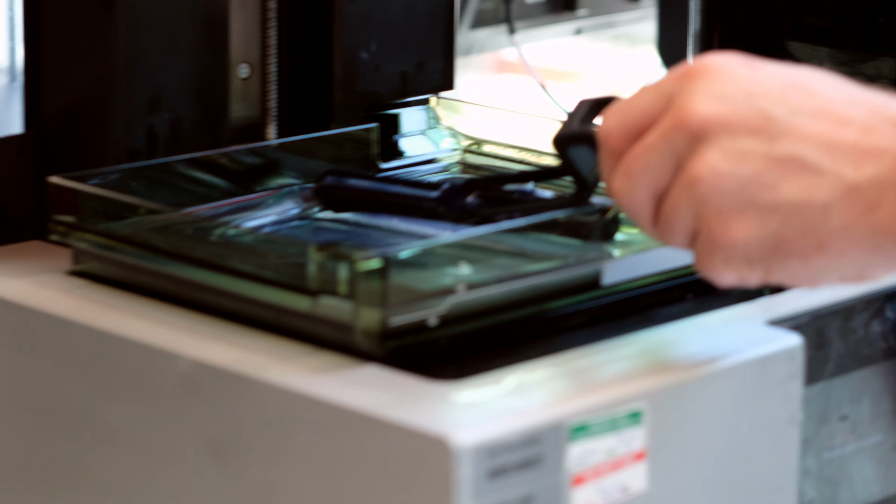So this machine here is the FormLabs Form2. It's now been superseded with the Form3, which has got a slightly bigger build volume. How it works, I'll lift it up. There's a liquid in here. A bit closer, have a look here, so I can move it around. That's a liquid, and it's a photopolymer. So it'll convert from a liquid to a solid when it's exposed to ultraviolet light.

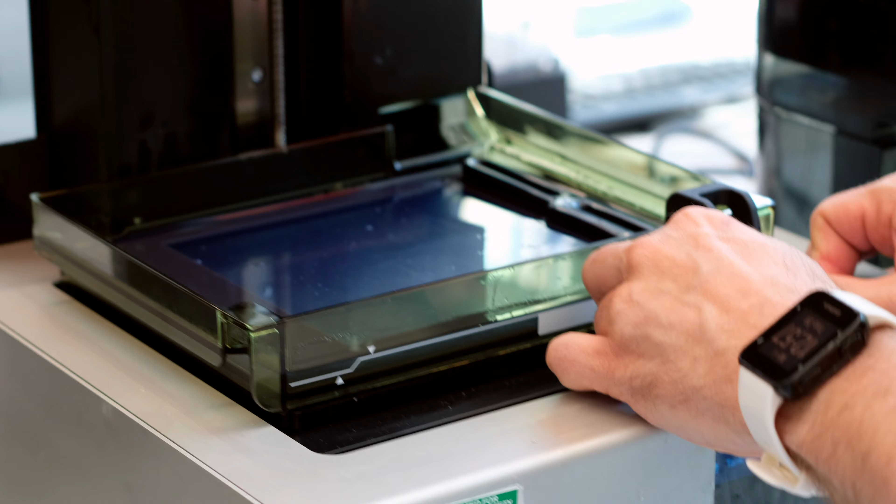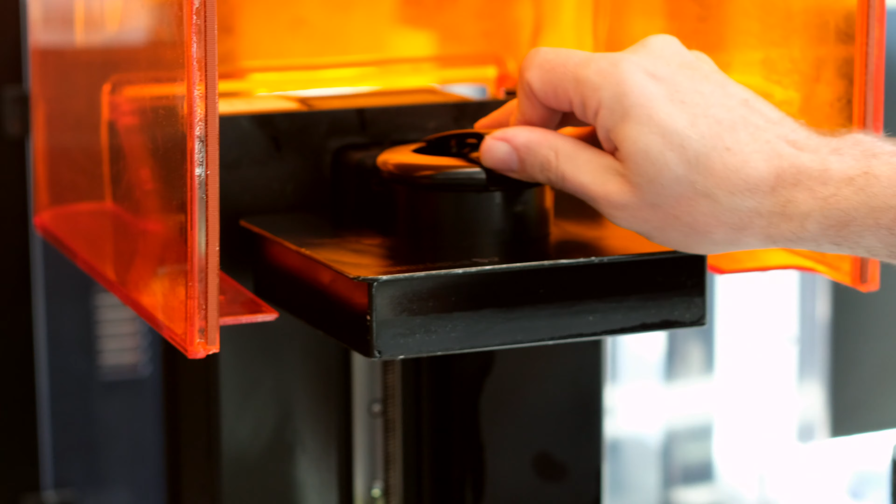And the exposure, you can see if we take that off for a moment. It's clear in there. And there's a screen, and there's a laser pointer underneath that screen. And that laser pointer will cure each layer as it builds the part up. This is a build platform. This build platform is just an aluminium base. It's well used.

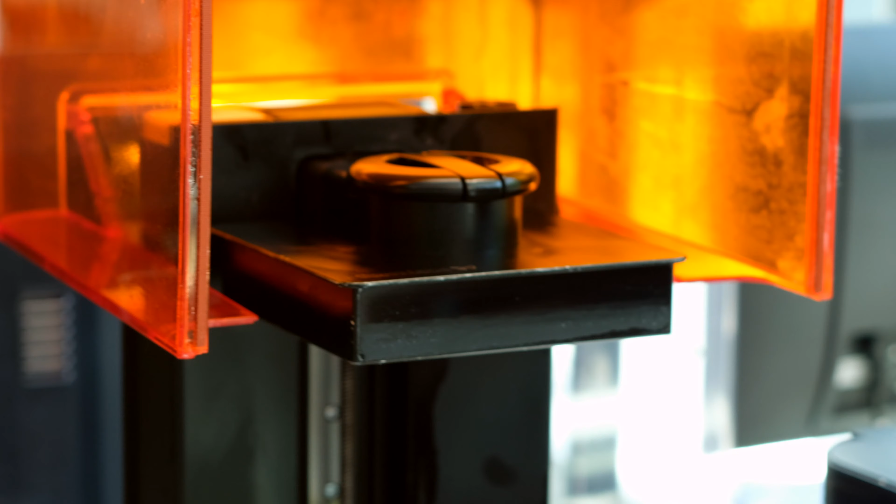So what it'll do, each layer, it will do a bit of a dipping process. It will go down to the build layer position. The ultraviolet laser will scan across and it will cure that particular layer. Then the build platform moves up. We've got a wiper here which wipes across, gets rid of any debris, makes a nice clean surface. Then it moves down again and it cures the next layer.

So rather than the other way round, here it builds the part up upside down. When it finishes, your part is upside down on the platform. You take it out, and we've got a wash station here, which is filled up with IPA, and that just washes any material off. The material is kept in these containers here at the back. I'll go into that in a moment.

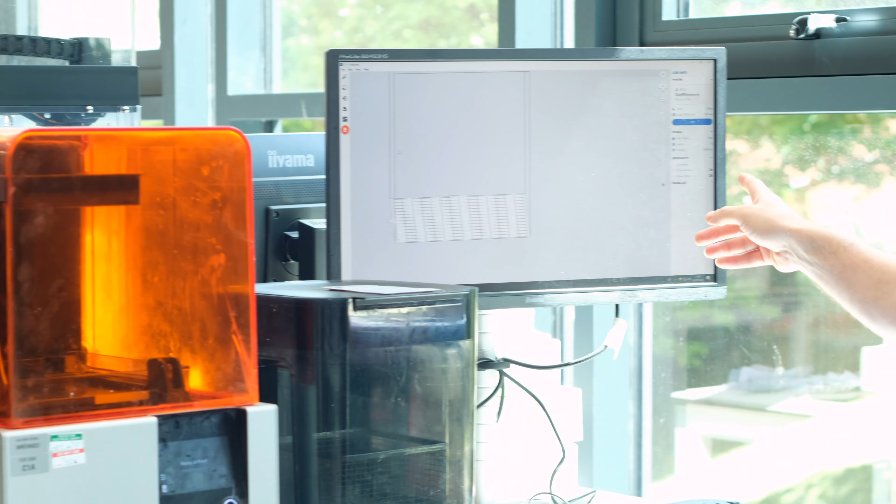So the software we're using is FormLabs PreForm, and I've opened it up previously. So very quickly I'm going to import a file. Now your desired file must be an STL file. Open. You might recognise that. That's the Loughborough University logo.

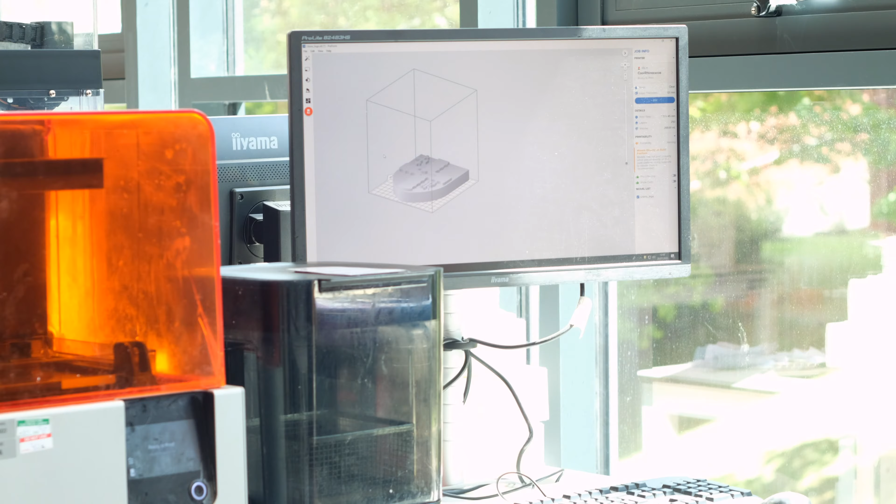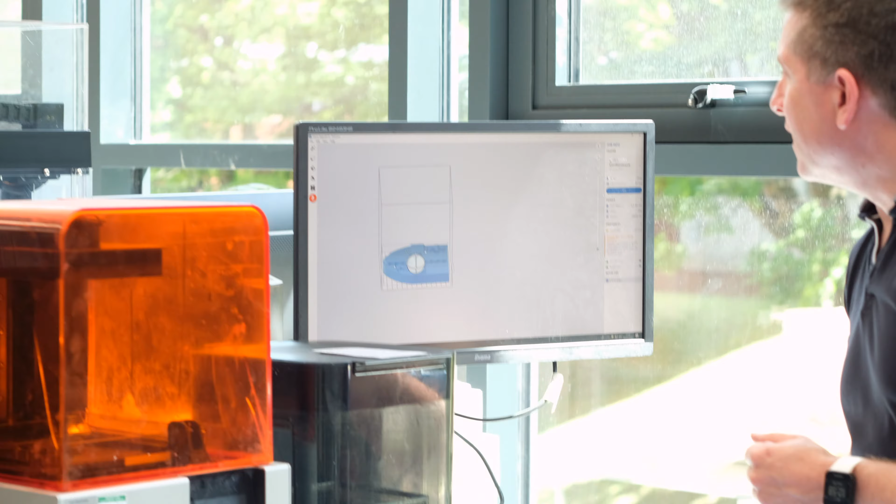Now, this process is quite particular on the positioning and orientation of the part. So first thing, I'm going to orientate the part how I wish it to be printed. I'm going to flip it up a bit like that, and a bit of an angle like that. So you might wonder, why would I build it that way rather than just a nice flat surface?

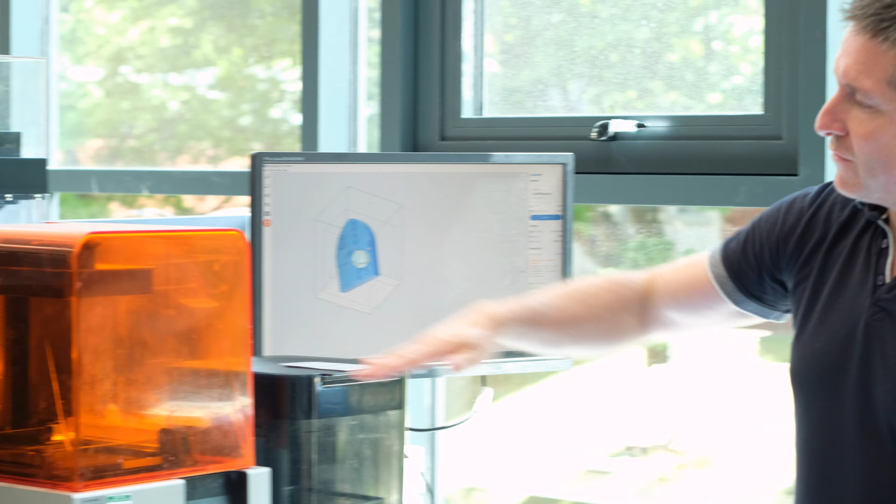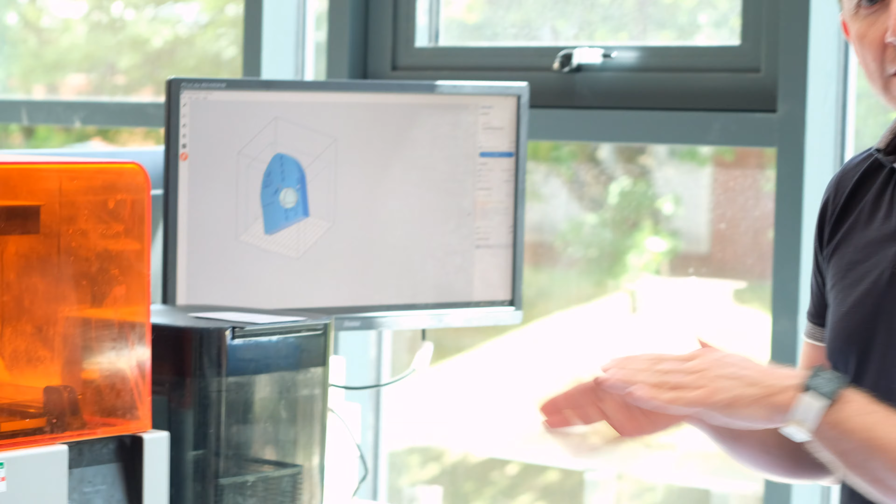And the reason is, when it dips in, there's a certain amount of stiction, if you like. Say you put something big and flat onto a flat surface and you try to lift it off, you get a bit of resistance. It's just the same here. So what we try to do is build it in an orientation where there's a minimum amount of contact onto the surface of the build platform.

That's in free space, so it could drop and move anywhere. So we want to secure the build part onto the build platform, and as well you might have some overhang issues which you get with other 3D printing processes, and you want to secure those in place as well. So we need to add the support structures. Very easy.

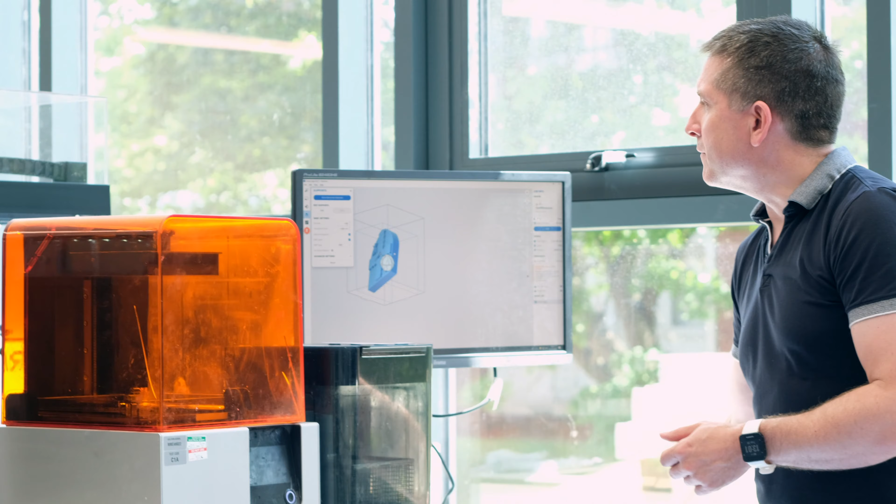I can just go on these support options here. You can manually add supports. And here you can say how far apart each support structure is and how thick the point size is. What I'm literally going to do is press auto generate. It takes a few seconds. Okay, so that took a while.

Now we don't have to go with it, we can check it. I can live with it. I've got some extra supports around here, so they'll have to be removed later. My main concern is the print time is 18 hours, even though I've got the thickest layer height, which is 0.1 millimetres. And it's going to use about 350 mils of material, which is about 80 or 90 pounds. So that is a lot.

So things I could do, well, I could redesign it. I could make the part thinner, create a shell from it, all sorts of things. But what we're going to do for this is just make it smaller, because it's just a nice thing to print. So I'm going to stop this, press the scaling button, the sizing button, and go for half the size, so 0.5.

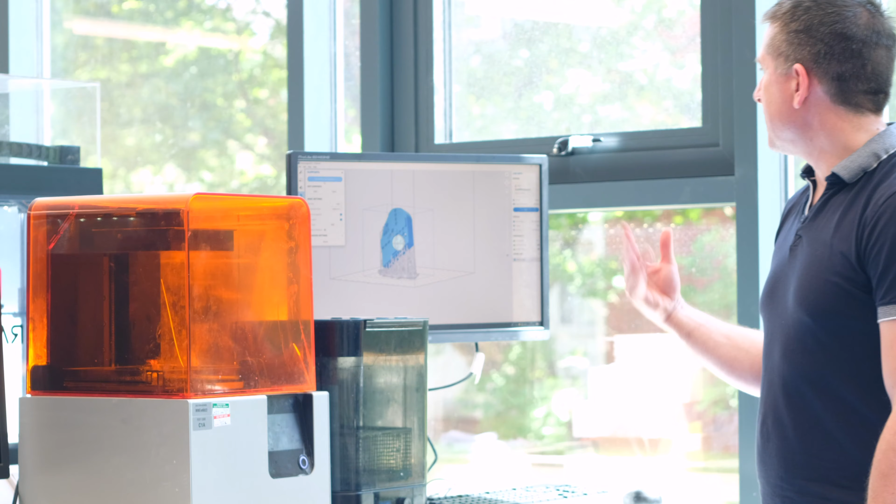Okay. Now what you can see, the supports have now disappeared. Okay, so those old supports are now invalid. So press to get the support option again, and then it's going to go to generate. Okay. So I've resized it, put the supports in, and now the time was 18 hours. Now it's going to be 4 hours, 15 minutes. That's a lot more reasonable.

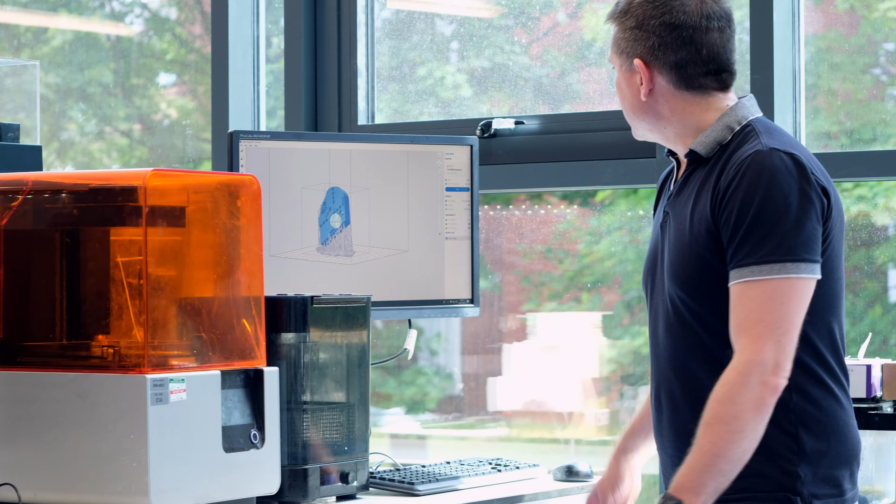And the amount of material used as well has gone from £90 to about £15. So I'm going to go with that now. Oh yeah, also I've got 3 little thumbs up here, so that's good news. So another time I'll go into that. So I've got my 3 thumbs up there, so I'm happy.

Now, to get the part onto the machine, you've got a couple of choices. You can either have network options or your USB stick. But what we've got here, we're basically hardwired, just using a USB. So I'm just going to press this button here, which is the start print button. And what it's done is just tell me how much material is in there, and the name and all that sort of thing. Okay, load job.

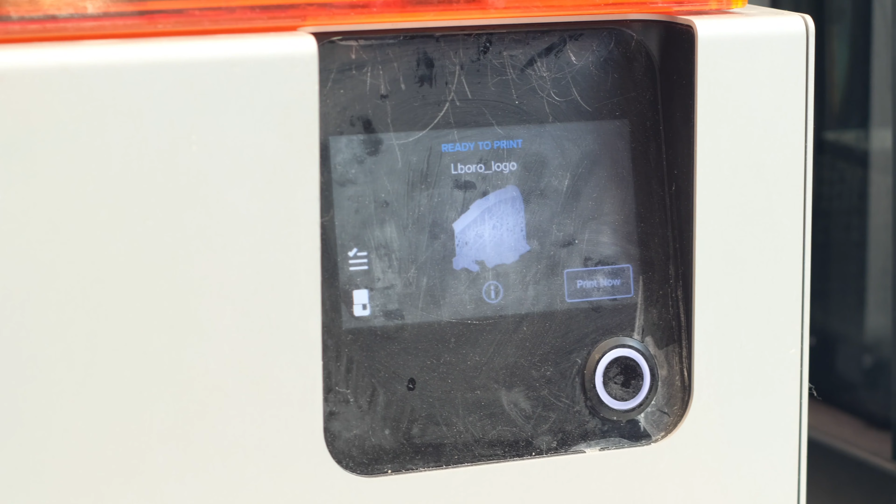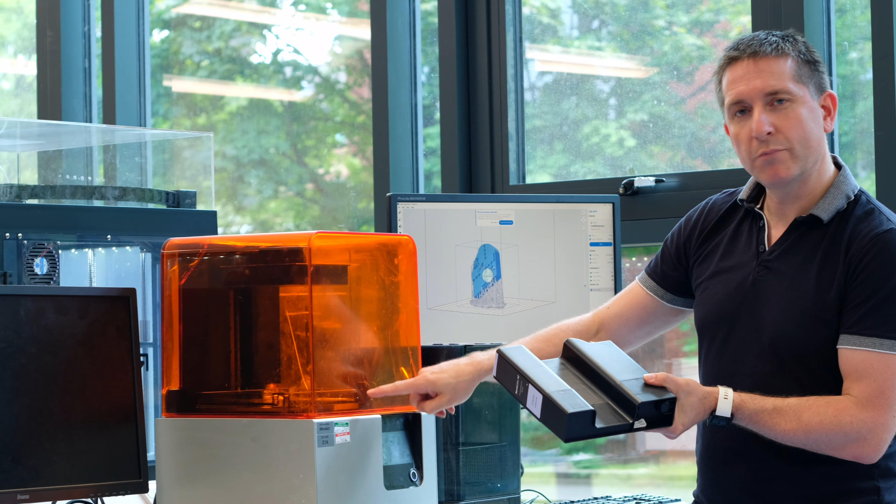So earlier I mentioned the cartridge here. So here it is. So you buy these online, and you've got a little slit in here which you won't be able to see. But basically, there's an injector which goes in there, and it keeps the level of resin perfect on the resin tank here. Okay, so I'll put that in there.

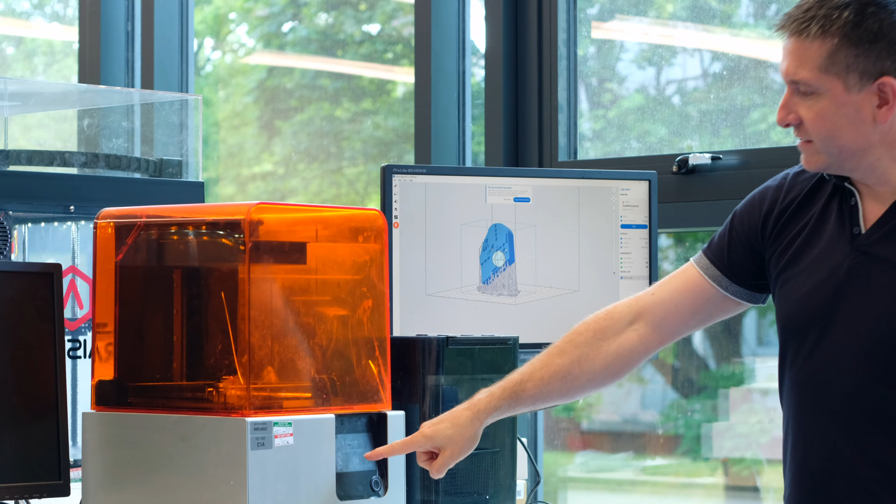Okay, now I'll just press print now, and it's giving me something to do. It says open a cartridge vent. So what I've got to do is make sure that top is open, which I'll do now. And it says check the build platform, and that is critical. Okay, so you've got to make sure, you know, we took it out earlier, so we're fine.

But someone else might have left a part on there. Okay, and if you start it, it doesn't know that, so it can go down and you basically have a crash. Okay, so I've done that. So I'll press confirm now using the hard button here.

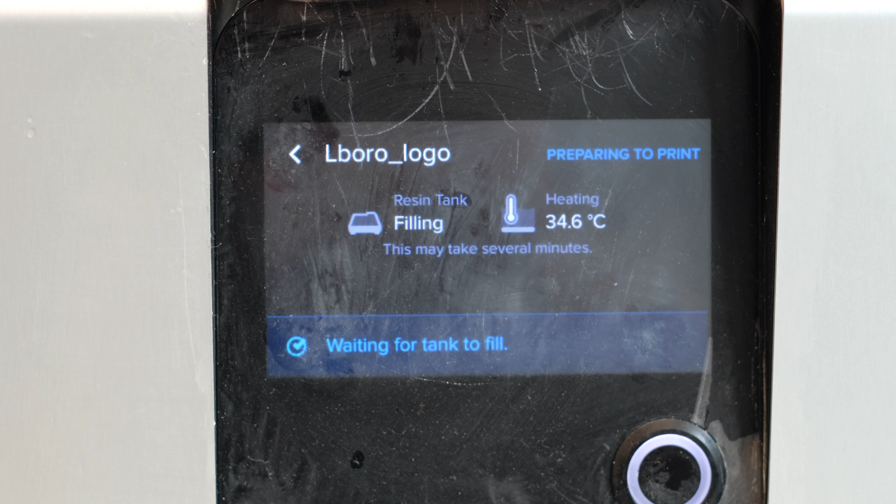Working well. So just to cover the chemical handling and things like that. The liquid in there can be a sensitizer to your skin. So if you're handling it, make sure you wear gloves. And when the part is finished, especially when you take the part out, it's all wet, wear gloves, wear a lab coat and eye protection. And when you transfer into the wash station, again, make sure you're wearing appropriate PPE because of the IPA content.

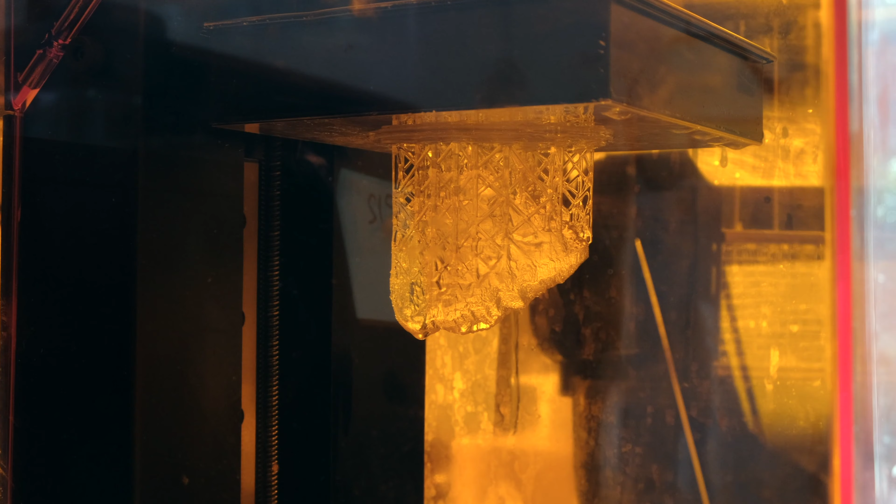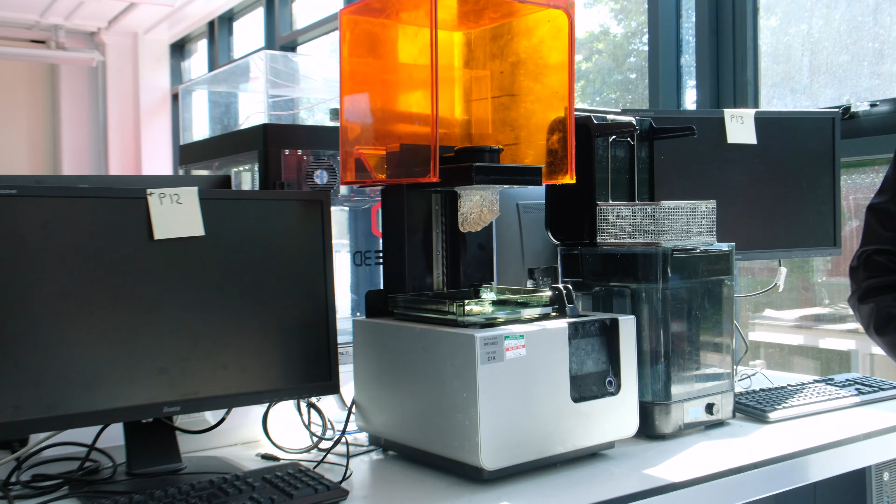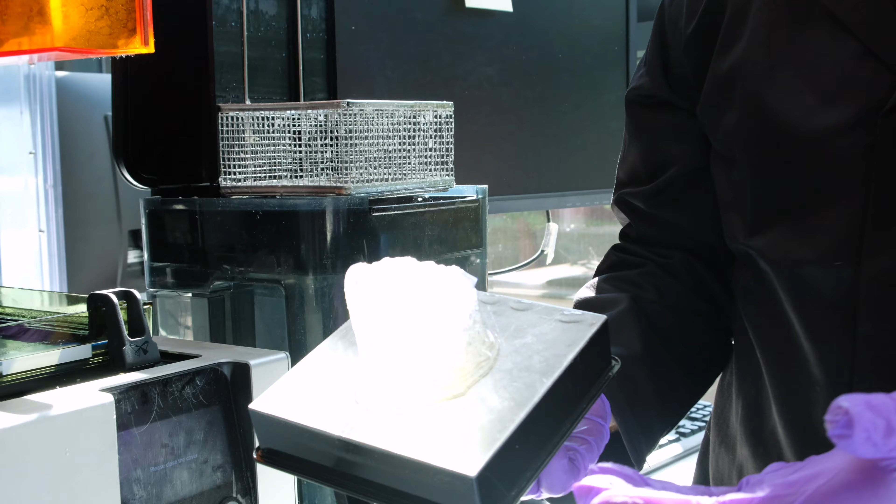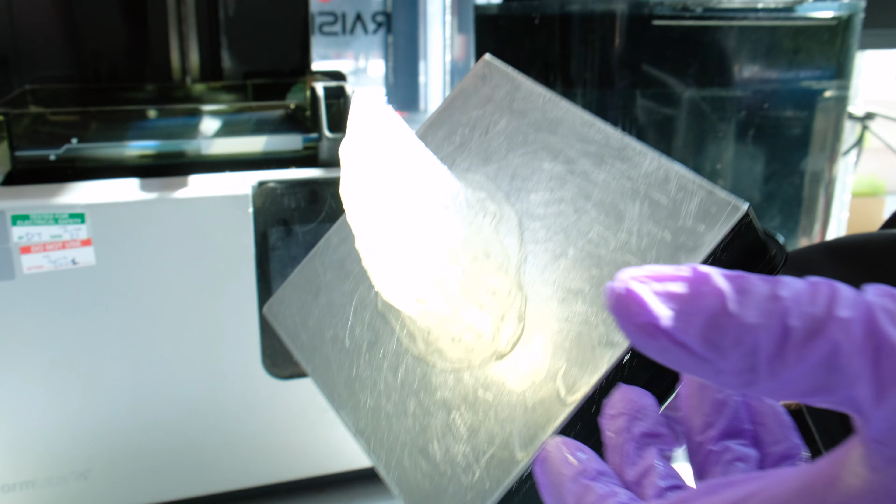Okay then guys, so I've done it. It's finished. So it took a few hours, and it hasn't worked out this time. So that's disappointing. But there we go. So take it out. Okay, but I'll still go through the process. As you can see, got supports here. Alright, so they need to be removed, and you can use side cutters and that sort of thing, but ideally you just want to give it a clean first.

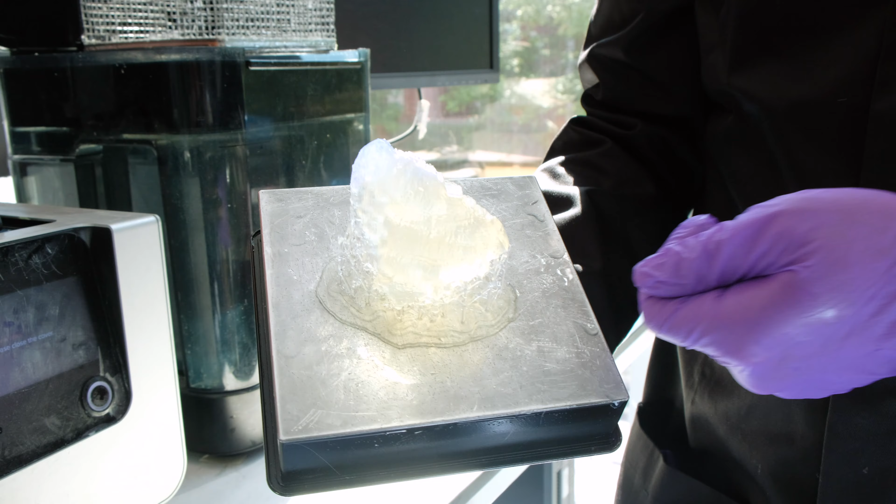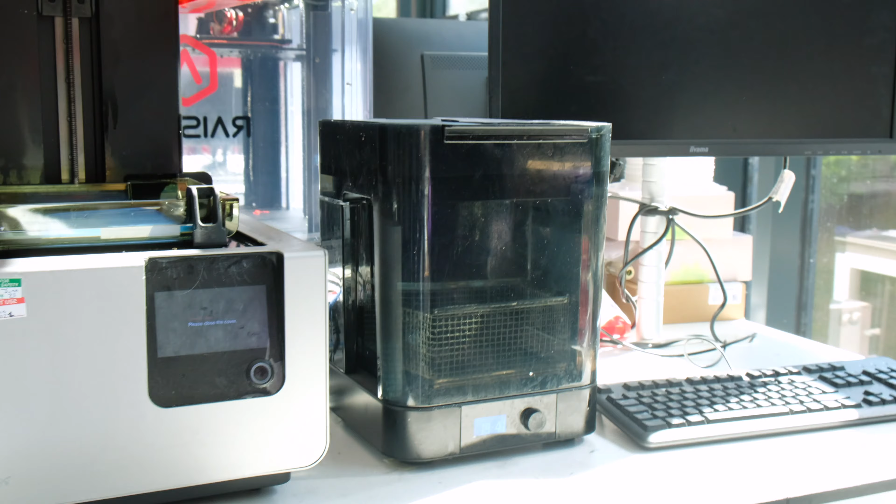Now, to take it off a build platform, you can just use a spatula and just basically pop it off the build platform, then put it into this basket here, or we can slide it on, press start. Okay, so this is, like I said, the IPA solution. So because now I'm handling chemicals, I've got my safety glasses on, my gloves, and a lab coat. Right, that takes 20 minutes, and when that's finished, that's it.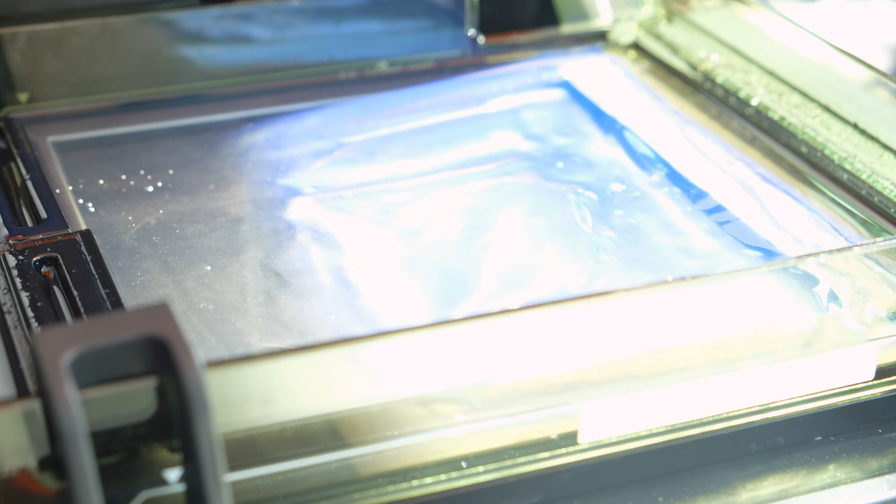Okay guys, so what I've realised, why it failed, I don't know if you can see, but just around here, it's solid just there, just where the sun is. So what I need to do is move the machine out to a more shady position. So that's probably why the part failed.